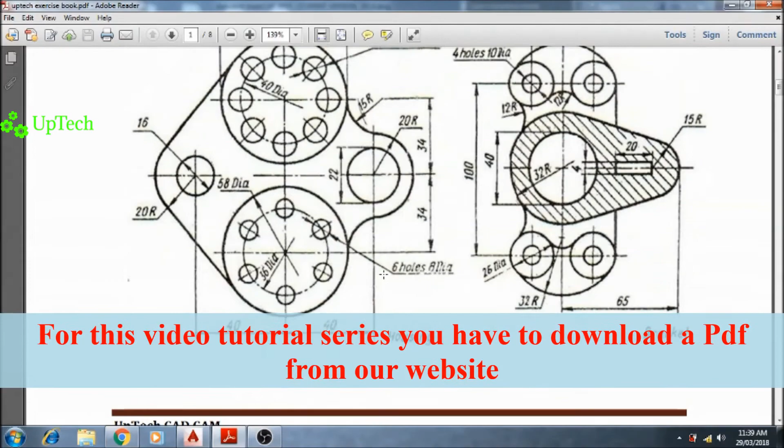So for today's video, example number 4, first of all you have to set limits of drawing. So type command limit, enter. For lower left corner 0, tab 0, enter, and for upper right corner 200, tab 200, enter. So in this fashion we have set limits of drawing.

Next, take circle command C, enter, specify center point of circle 0, tab 0, enter, and radius is 20, enter. Next, again repeat previous command, that is circle command, press space button from keyboard, specify center point of circle 0, tab 0, enter, and radius is 32, enter.

Next, change layer from layer toolbar to center layer and specify a vertical center line passing through this circle, and next again repeat line command, press space button from keyboard, specify horizontal center line for this circle.

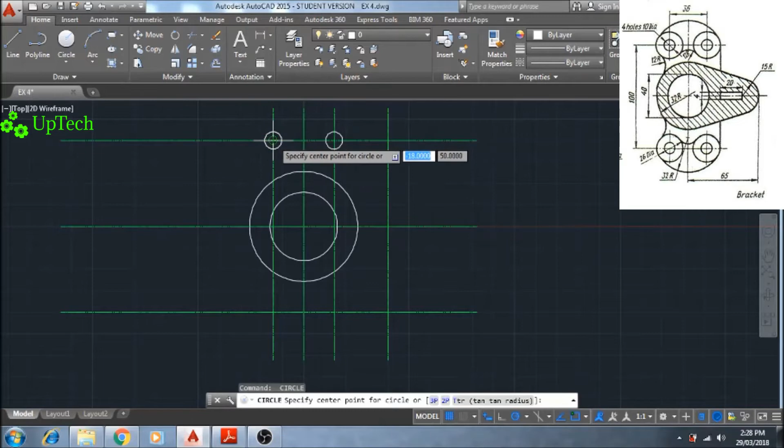Next take trim command, that is TR, enter, select object. After selection of object, press right click and select the region which we don't want. Next press escape button to come out from the command. Next take circle command C, enter. Again tangent tangent radius TTR, enter. First point, second point, and radius is 12, enter. Next again take trim command TR, enter. Again enter. Select region which we don't want.

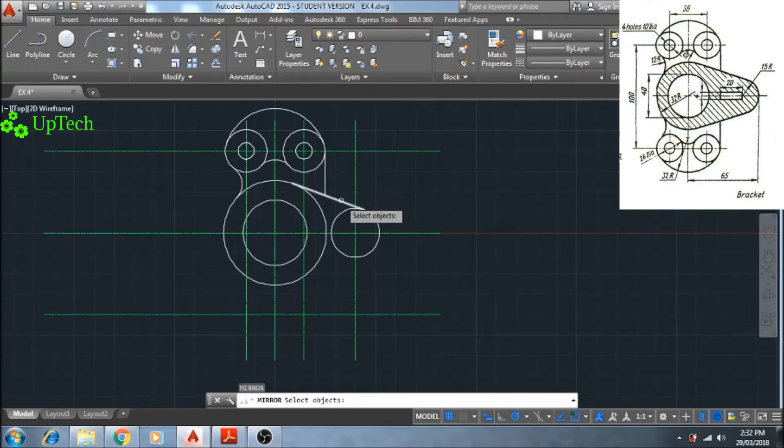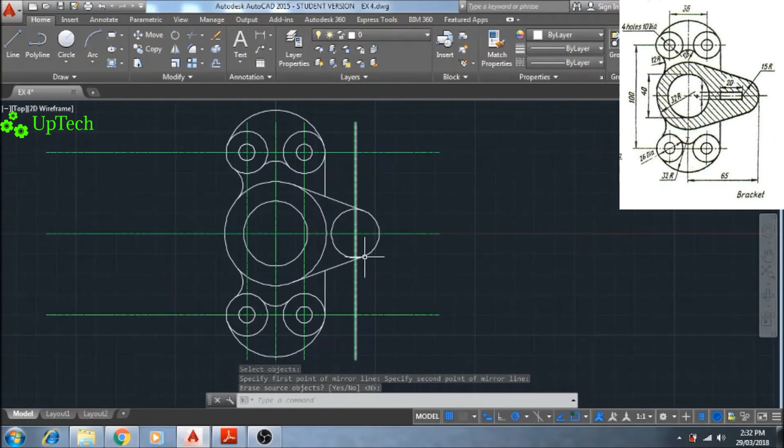Next, this section is exactly mirrored below. Take mirror command MI, enter, select object which we have to mirror, then press right click, define symmetric line, and then press enter. Next take trim command TR, enter, select object, then press right click and select region which we don't want, and then press right click, enter.

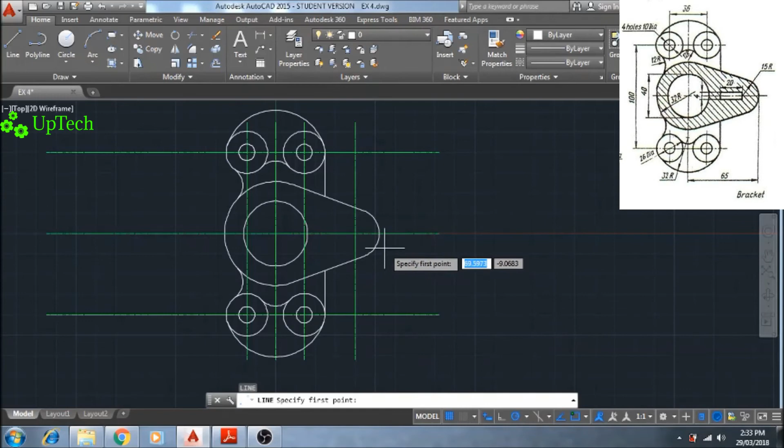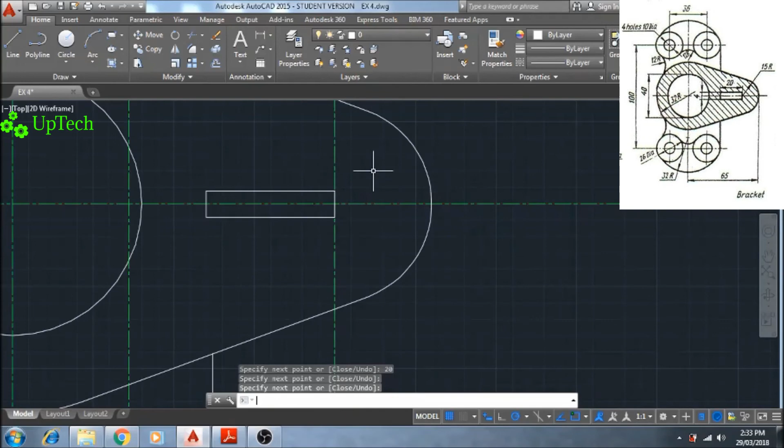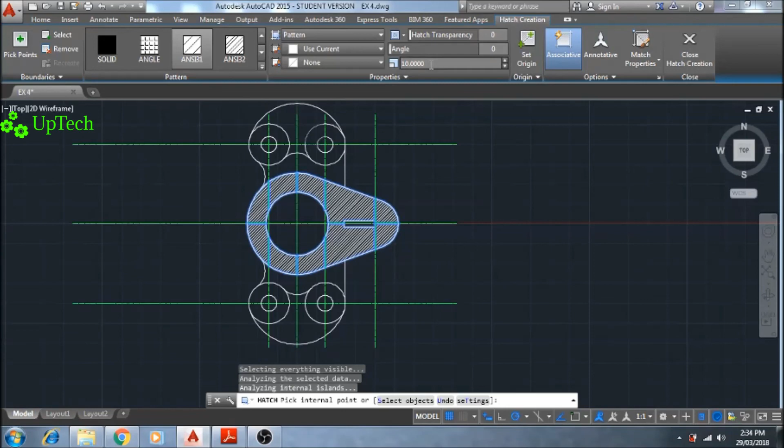Next take line command L, enter, and specify start point of line, distance is 2, vertical line, enter, then horizontal line 20, enter. Next 4 for vertical line, and then 20, enter, and then 2, enter. Next take hatch command H, enter, and then pick internal points of the region where we want hatch, and then specify scale of 10, enter, and again enter to close hatch properties dialog box.

So in this fashion we have drawn this drawing.